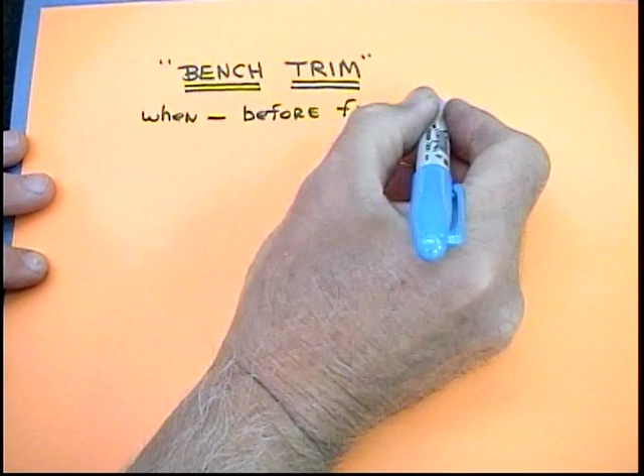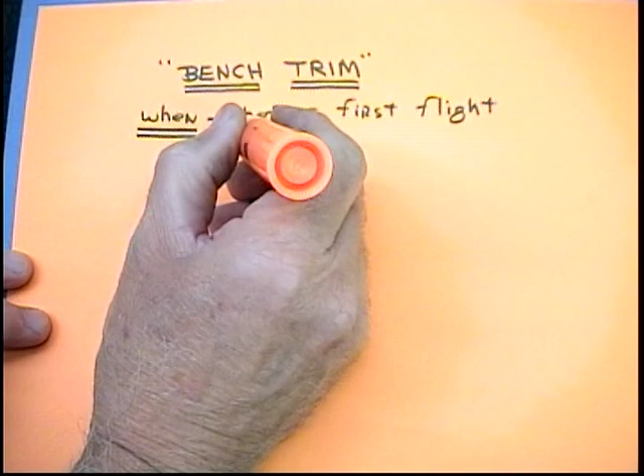Now, a lot of the things that I try to get across in my videos are very simple, basic things, but a lot of times when you think them through, what you're not realizing is this is a very simple point that's easy to miss. A lot of people would take that new plane, new profile, new whatever they've just built, and go out, take it right off the bench, and go fly it. Well, here's what I'm suggesting as a better way. Before the first flight, I like to do something that I call bench trimming. That's what most people call trimming out a model before you actually fly it. And how we go about doing it, and how we do it to various classes of planes, that's going to be the subject of this tape.

Now, why would you do it? A lot of people might ask, well, gee whiz, I just finished up my Flite Streak profile or a very simple plane, an ARF or ARC. Why do I need to do it? Isn't it all done when you buy the model? Well, some of it is and some of it isn't. But I want to cover the why.

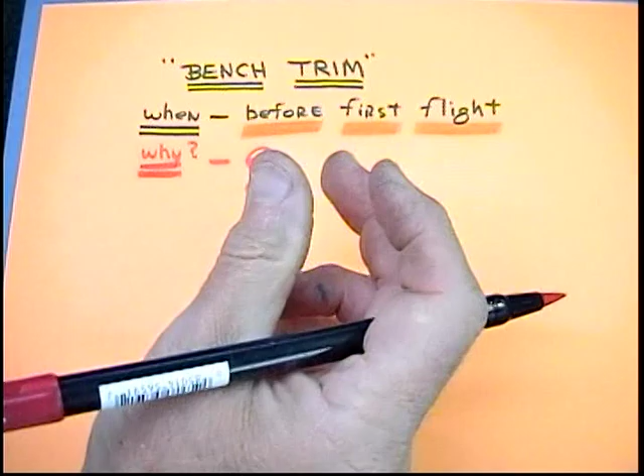Why? Because the various models, because of the way they're constructed and the material they use, whether they're ARFs, ARCs, or world-class world champion planes, they all deal with a thing called the center of gravity. And that center of gravity varies even in planes built by the same person at the same time with the same wood. That CG can vary. So part of this is going to be to identify where the CG is and then trim accordingly.

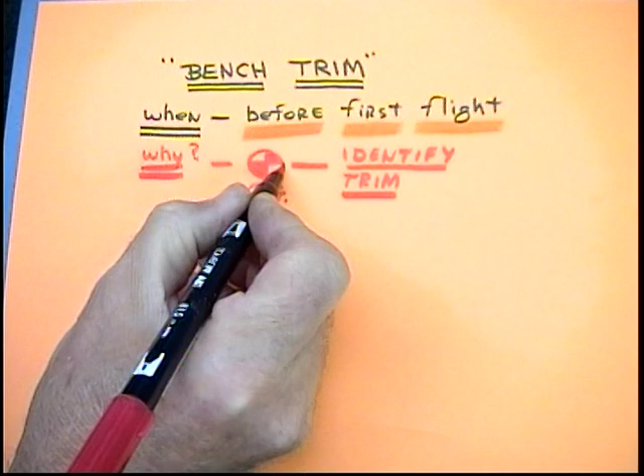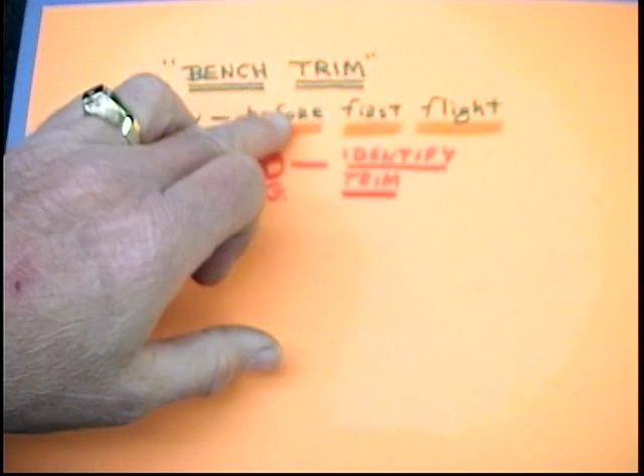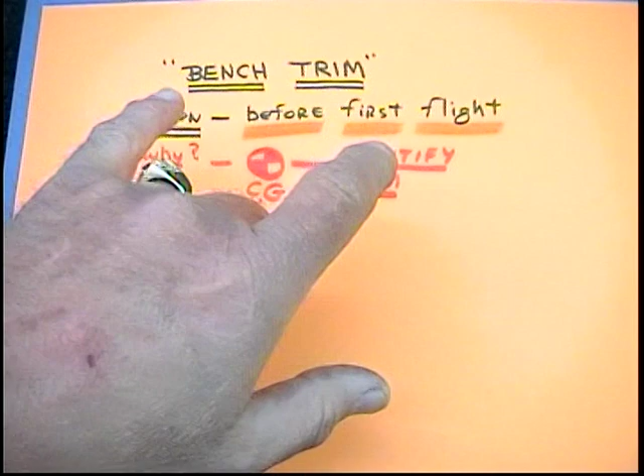We want to trim nose heavy planes, tail heavy planes, ships that have an incorrect or hard to deal with CG. But a lot of what we're going to be talking about is going to be called the center of gravity. So the first thing to really evaluate for yourself is when you want to do this, you'd really like to do it to maximize the potential gain before you ever fly the model. And that's why we call it bench trimming. And why would you want to do it? Because these CG locations can vary from model to model, among other things, including wing warps, things we're going to deal with in detail. But these are the basics. This is like 101 basic bench trimming.

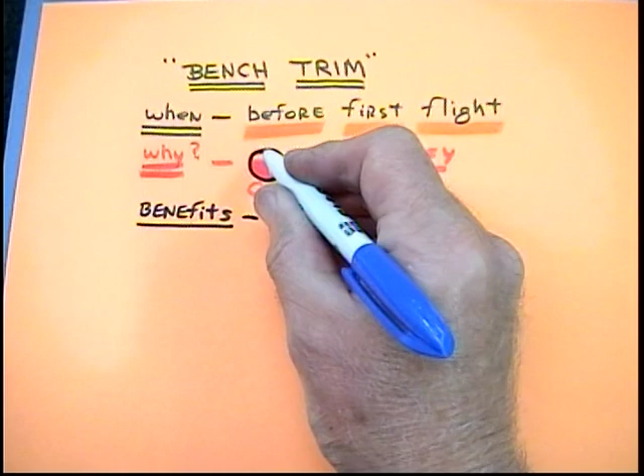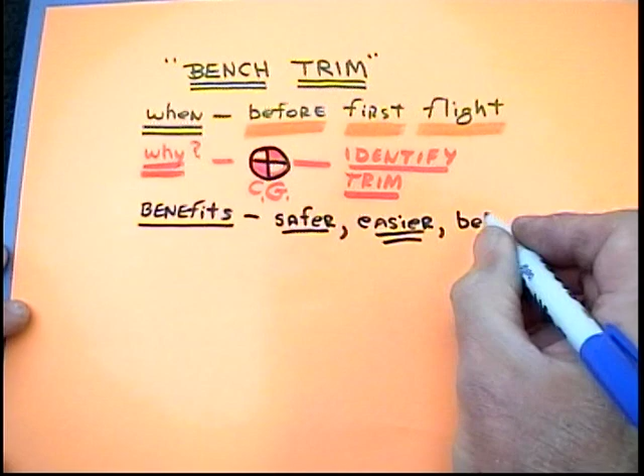So what would be some of the benefits of doing this? You're going to spend a couple hours, maybe more, maybe less, but some amount of time. Well, what we're trying to achieve, referring again to the center of gravity, the place where the model balances, some of the benefits would be the plane would fly safer, less prone to crash. It'd be easier. A model that's properly balanced, properly trimmed, and checked for warps is going to be safer to fly, easier to fly, if nothing else, and better, among other things.

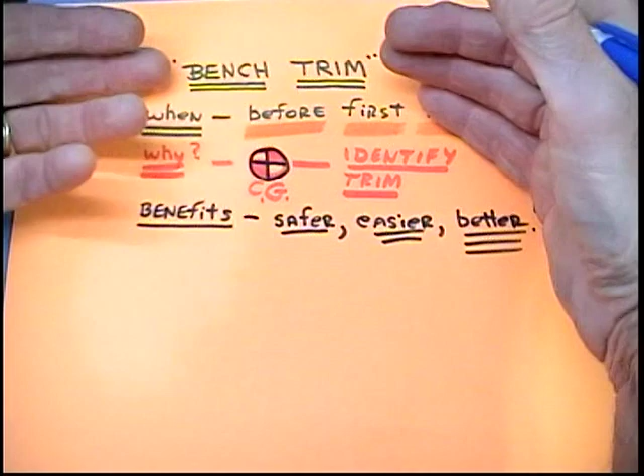So the point here is that, hopefully you'll get some of this information from this DVD, maybe some that you'll add to the information that we're exchanging, but you'll go through a process, and at the end of it, you'll be better off than you were at the beginning of it.

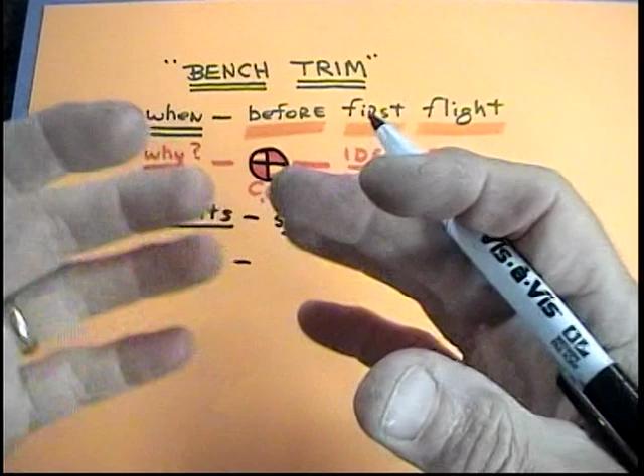Now, how to go about doing it—this is a method I've developed over about 52 years of flying these types of control line airplanes. I've tried to put all the information I've learned into all my videos and DVDs, but how to go about bench trimming it, how to get the most value in bench trimming.

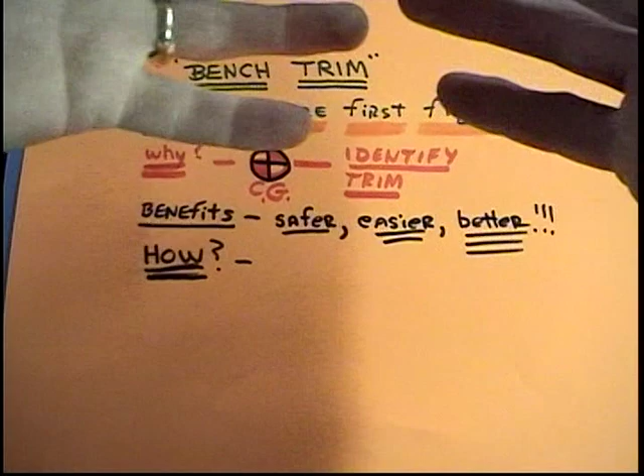So that you absolutely stack the deck in your favor for that first flight. We're going to deal with many various aspects and steps of how to bench trim. A lot of this, I've made up a little script that starts off with very simple basic things, and ends up with things that may or may not even be appropriate for people not trimming out world-class stunt ships. But we're going to try to cover the whole range of possibilities.

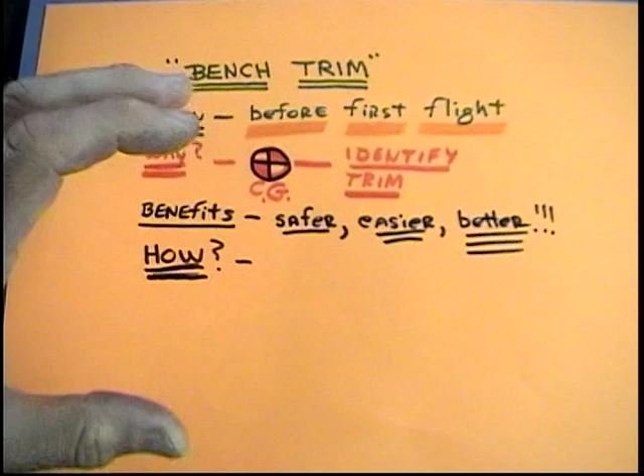We're going to try to do it in a way that makes sense, because the example I always use is a person that's really, really good at what they do, at teaching, can make a very complex subject seem simple and easy. That's what we try to do with all our videos, all our tapes. We'll also try to make it fun, but we want to start with a couple of basic things that'll help you understand what goes into bench trimming a model.

So the first thing I'd like to explain—we're going to use this Brodak Cardinal profile as an example. The first most basic thing anybody would want to know: you're going to have a wide variety of engines that are going to go in a model.

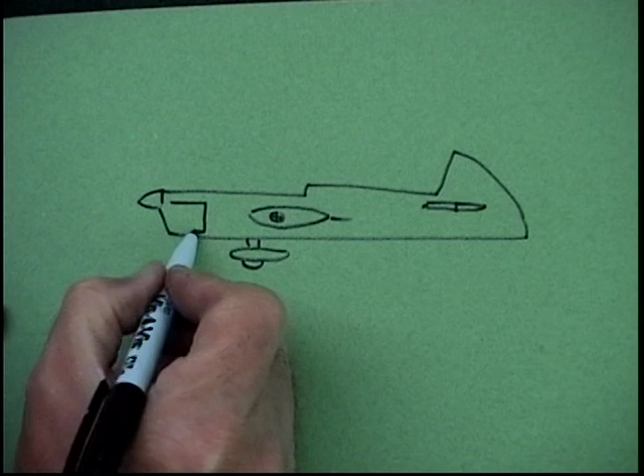Let's use an example. A Nobler was designed around a Fox 35. A big Cardinal was designed around a Super Tigre 60. Well, based on how much this motor weighs, we're going to turn the plane into something very similar to a seesaw.

Now let's just pretend the model is a seesaw—this is an oversimplification. On one end of the seesaw we have all the things that go in front of the center of gravity. This, of course, is the center of gravity. And on this side, all the things that go ahead of the CG, behind the CG.

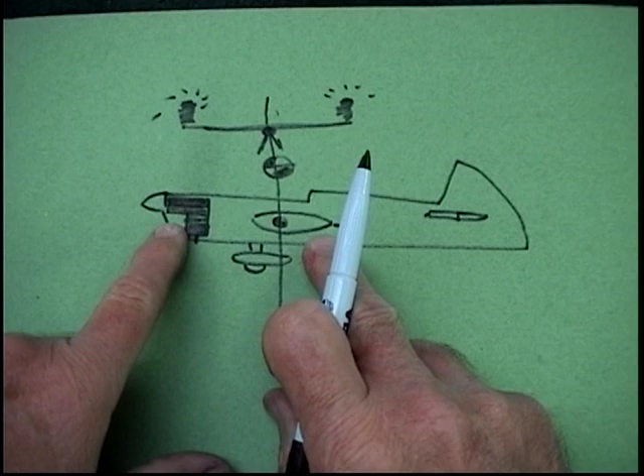What you notice right away is a lot of the heavier components—the motor, the fuel tank, the wheels, the landing gear, sometimes or most times the spinner, the prop—a lot of these things are ahead of the CG. However, they're closer to the CG.

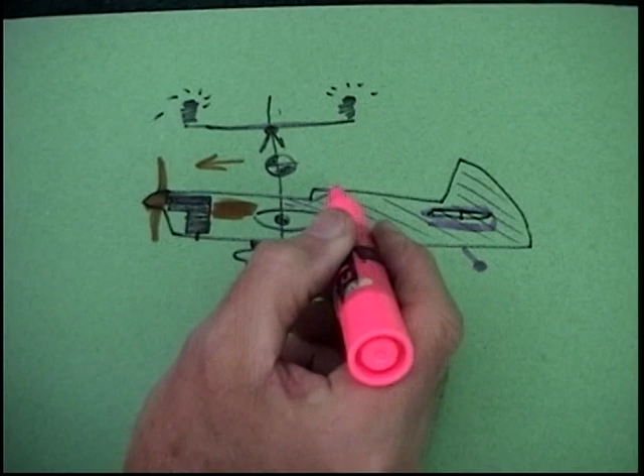A lot of the things that are behind the CG are a little bit lighter. The tail is typically lighter, the tail wheel is typically lighter. This amount of the body is typically lighter than the part with the motor mounts, but the problem is it's on a longer moment arm. And what the moment arm means is this part of the seesaw is longer.

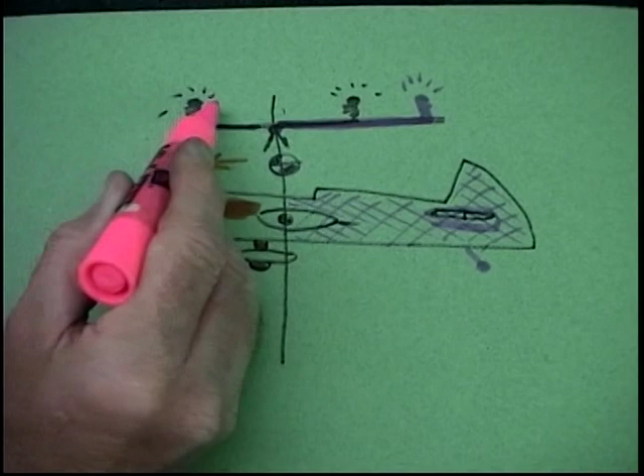So here's what we're really dealing with: a seesaw where the back is a lot longer than the front. The front is heavier, the back is longer. And understanding that gives you a real basic idea of what you're dealing with.

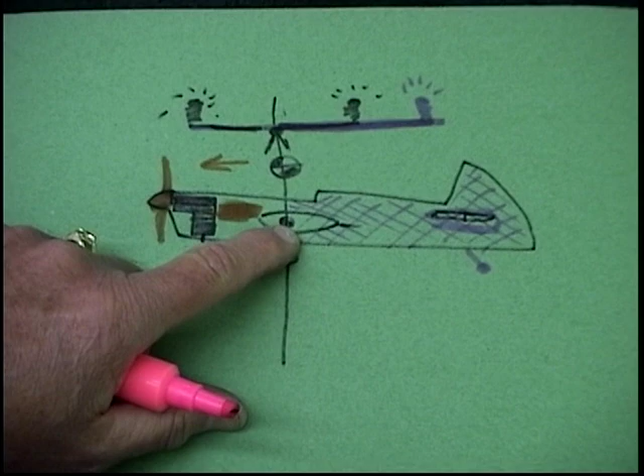But you need to know where that center of gravity is before you can really make any progress or even start to trim a model. The single most important thing to know when you finish a model and it's painted or MonoKoted, buffed, or if you just buy an ARF, is where does it balance? This is 101 basic—where does it balance?

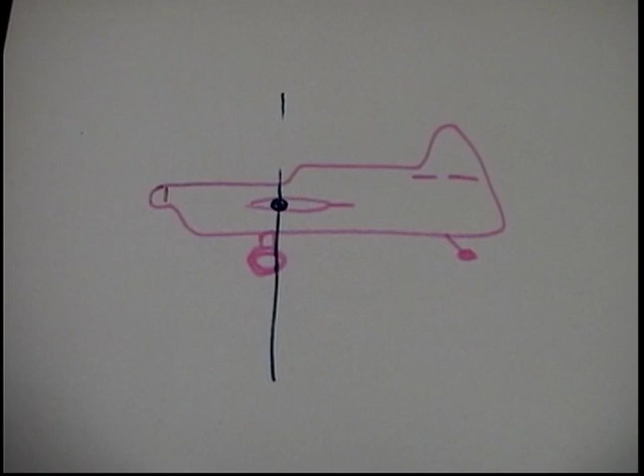Now, for all practical purposes, to be very simplistic about it, the simplest way to determine if a model balances is just put it on two rolls of paper towels—I would sketch these in—and it should, somewhere near the high point of the wing, it should balance.

In other words, when we lay a roll of paper towels out and lay the model out, if the nose tends to drop, it's nose heavy. If the tail tends to drop, it's tail heavy. So we want to know, first, before we do anything, with this new model: is it nose heavy or is it tail heavy?

And this is a basic way of doing it, right at the root of the wing, right outside of where the fuselage is.

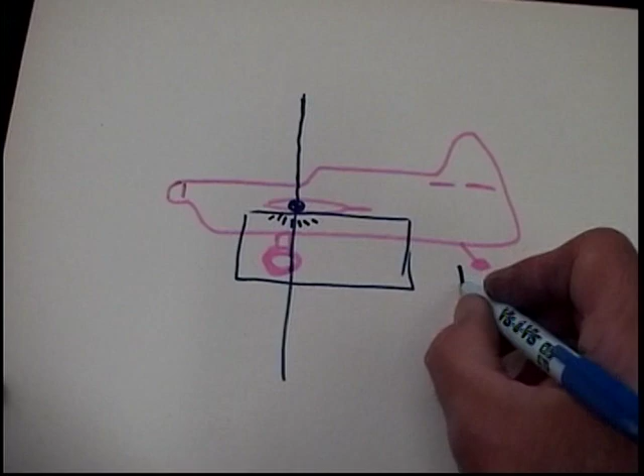If the tail drops, that's the worst scenario possible. A tail-heavy plane is very difficult to fly. It's unstable. So if we have a choice of, if it's not balanced right where the designer calls for...

If you look at a Nobler and you see where George Aldrich picked the center of gravity that he felt was optimum, well, if you're wrong and it's nose heavy, if when you lay it on the high point of the wing, the nose tends to fall down, it's a lot better than, in fact, let's just sketch this out. This we can live with.

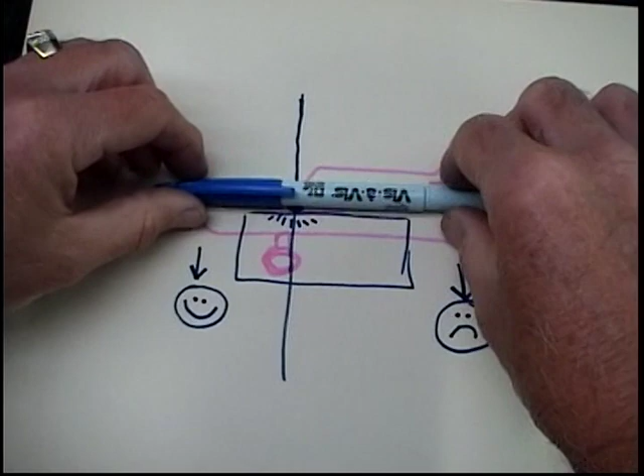This is going to get risky. So if it's not balanced in just about the way we'd like, or if we're wrong, nose heavy is going to be better than tail heavy. And it's going to be better by a lot, and for a lot of reasons.

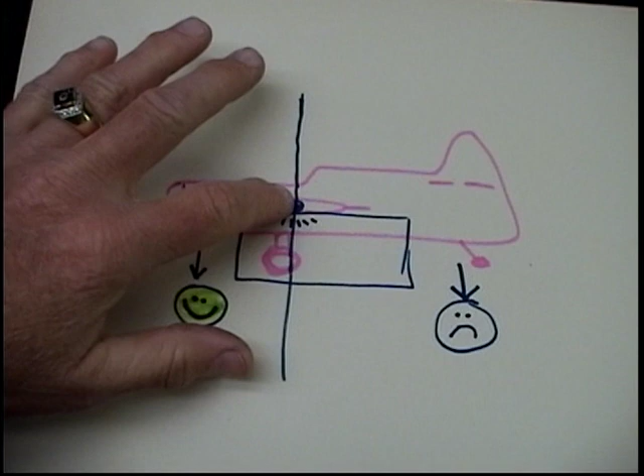And as we'll see, as we go through more of the detailed parts of this, this is only one center of gravity, but it's the most important one for the beginners or the new people or the people coming back to the sport after many years away.

First thing, before we go anyplace else, we've never flown the model, we don't even have handle and lines, we want to put the motor in, want to put the prop on, the fuel tank in, the wheels on, every part. And then we want to see where does it balance.

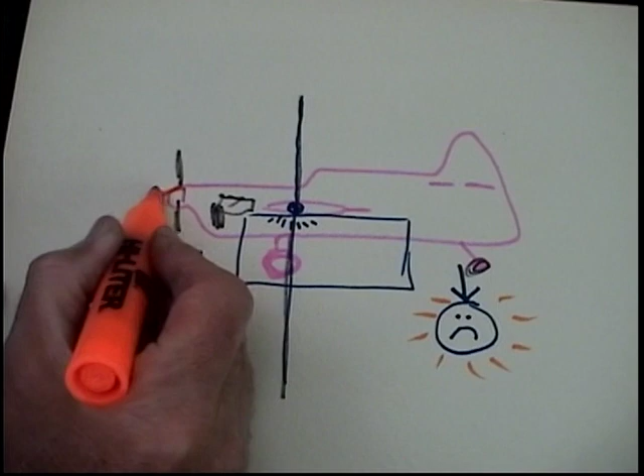Now if we find out it's a little tail heavy, or if that tail tends to sink down, the choices are very easy. We can put a heavier spinner, a nose weight, a heavier muffler on the motor, all of the above, a heavier prop. A carbon fiber or nylon prop instead of wood, or a heavier motor.

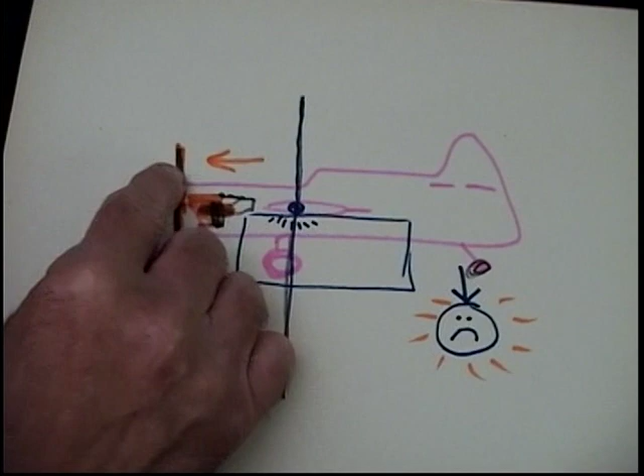But for sure, unless I was an expert flyer, I'd want to start with the model being nose heavy, and then little by little take some of this weight out. As you take the nose weight out, the model is going to get more and more unstable.

Unstable being that in level flight, it's going to want to change direction quickly, and of course, during maneuvers, it's going to loop tighter and turn tighter in corners. But every part of that trim is a trade-off. As the plane gets more and more unstable, it gets harder and harder to fly.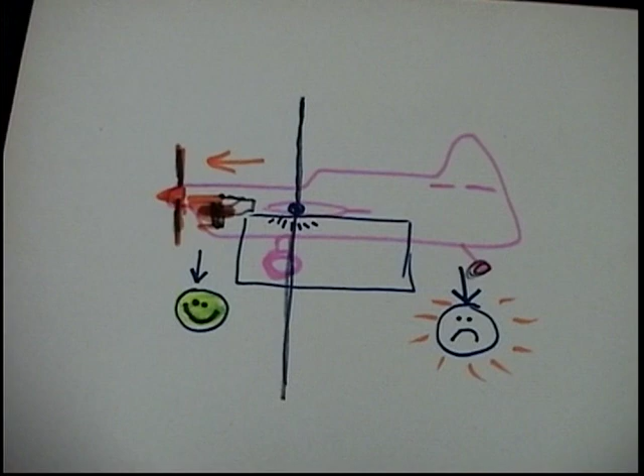So we want to reach a compromise where your skill level would determine this. Now, if you were, for instance, a rank beginner, or you're trying to teach your grandson to fly, you'd want this CG forward. Where it balances, even then add a little bit of nose weight.

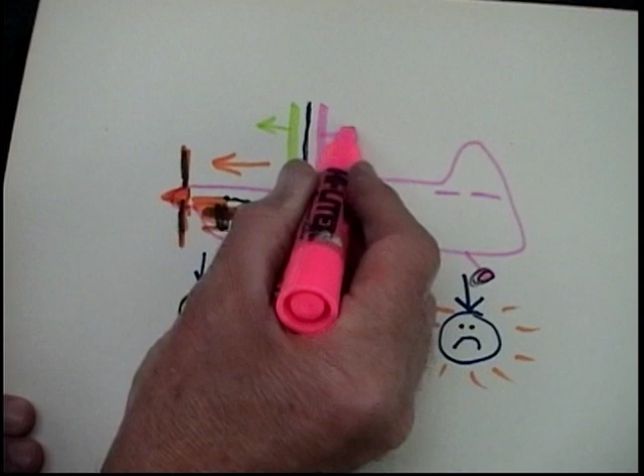As you get to be more and more proficient, more highly skilled, you can move this center of gravity back, up to a point. And there are reasonable and unreasonable amounts you can move this. But usually what you'll find is on most models there's a range.

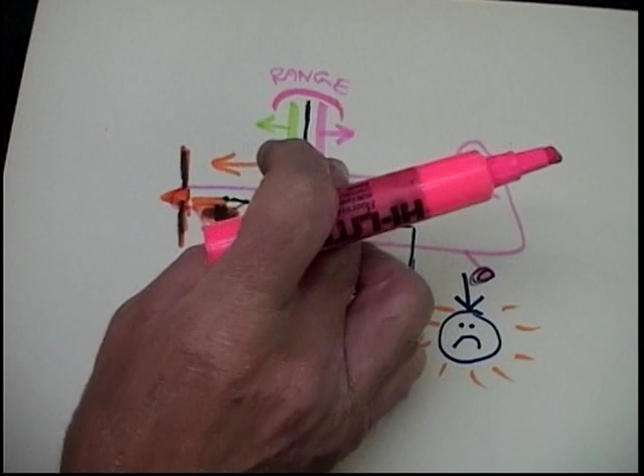I'll detail that out in terms of degrees later on, but there's always a range each model has where at this forward point a rank beginner would be comfortable. At this rear point, people that are very highly skilled would be comfortable.

Now what also tends to complicate this is as models get, a light model, if you build a kit and all the wood is very good and you tend to finish very light, do a lot of sanding, a light model tends to balance nose heavy, which is good.

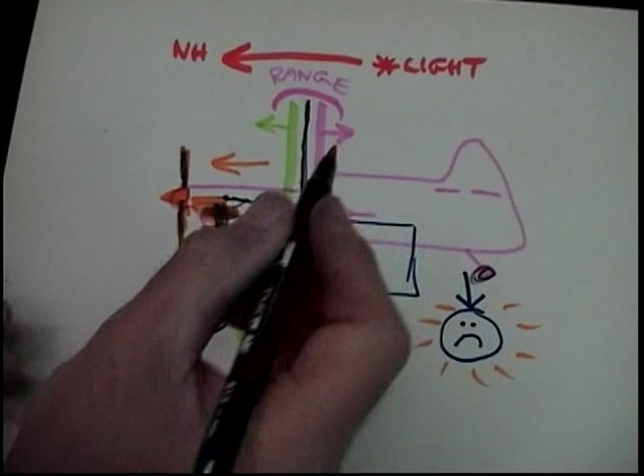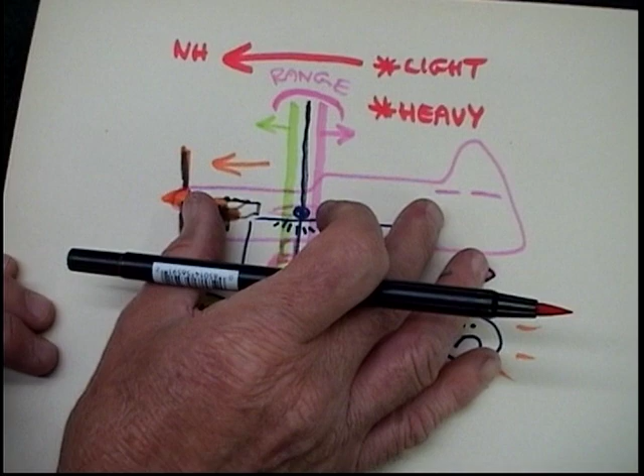If you build heavy and the total weight of the model, and of course this is all a subjective thing, let's use a Nobler for an example, and you build it at 50 ounces, the odds are real good it's going to be tail heavy.

The reason is more and more of the model is behind the center of gravity. So as you add material, paint, glue, that end of the model tends to get a lot heavier quickly than the nose part. So there's always the tendency.

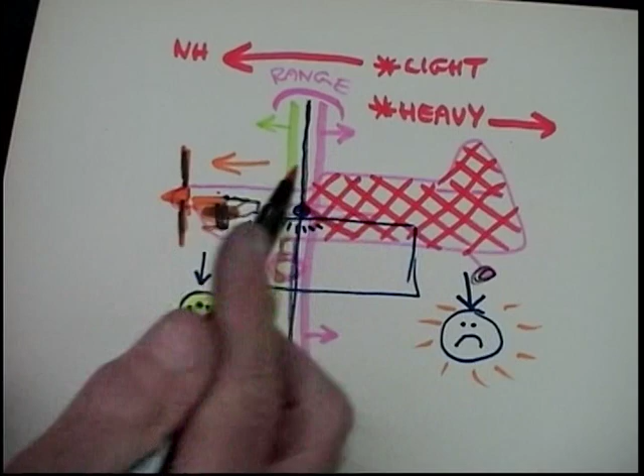A light model will tend to always be nose heavy. A heavy model will always tend to be tail heavy. And that's just a general assumption.

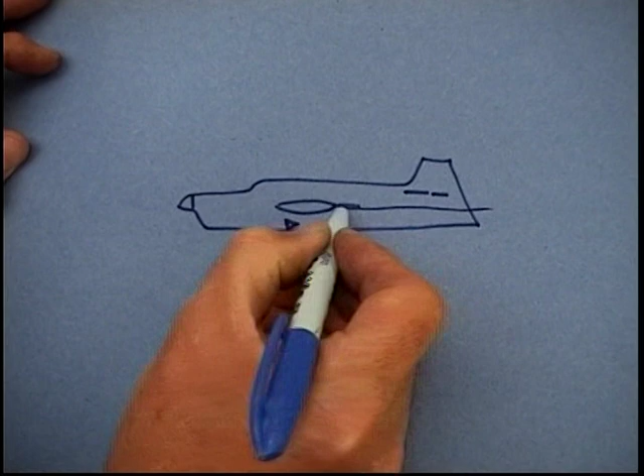Now we also have an issue of, and this is less critical, but still something you would want to know, is we want to divide the model up, the center of gravity. We call this the vertical CG.

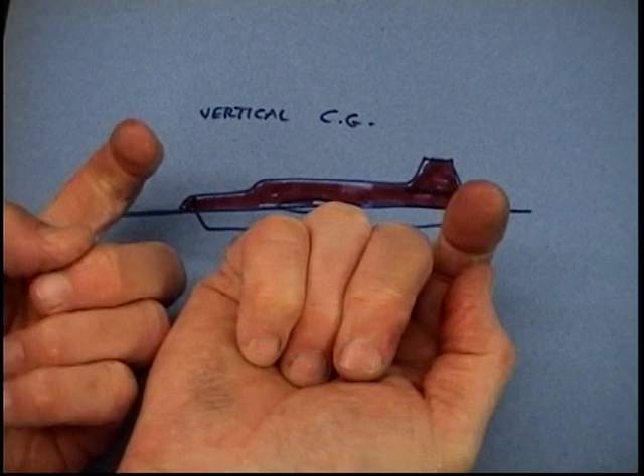Before you even fly a model, it'd be nice to know if the top is heavier than the bottom. The way to check that is normally with your two fingers: put one finger in front of the wing, right on the center line, and one finger behind the flap. This is the basic method for profiles and a very simple way to do it.

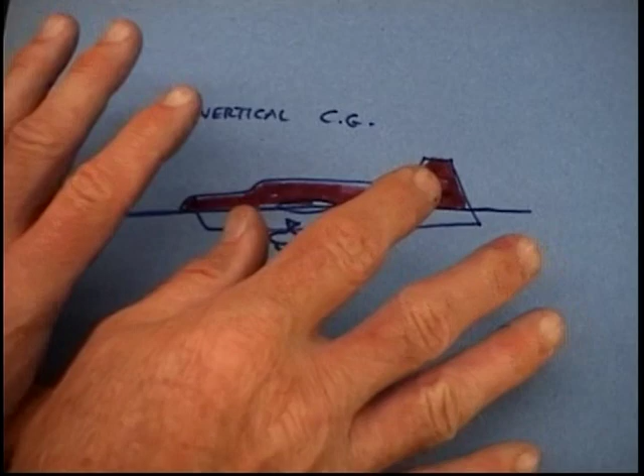There's a lot of complicated ways with plumb bobs, but this is a simple way: hold the outer tip down and see which way the model falls. That's when that model is sitting straight up and down, like it's sitting on its wheels.

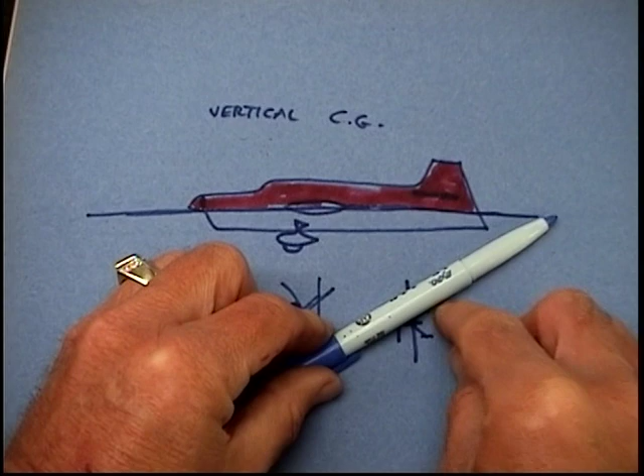Now, of course, it's the other way around, assuming you don't fly backwards and fly the traditional way. So while the model's like this, if it tends to fall with the wheels going up, you can add heavier wheels or make the landing gear longer. If it falls the other way, with the wheel side tending to fall down, that's a low CG, and it means the model will probably need a trim tab or some trim to keep the wing level. Let me explain why that is.

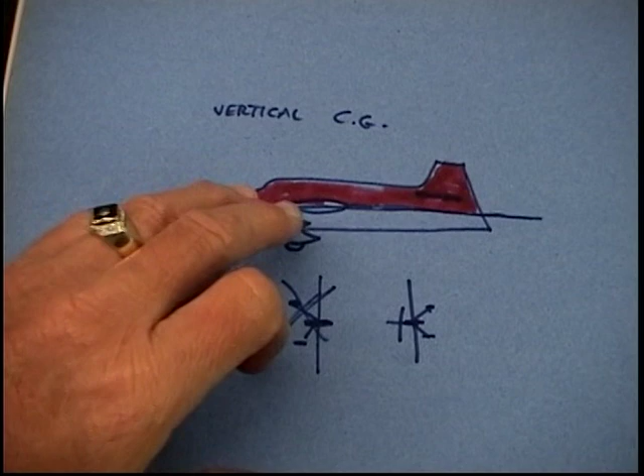This is getting into an area that's a little complicated, but certainly not out of reach for any accomplished modeler to figure out. Again, we're looking at the model head on, and let's emphasize what bad things happen when this is wrong. They're not as bad as when it's out of balance the other way, but still bad.

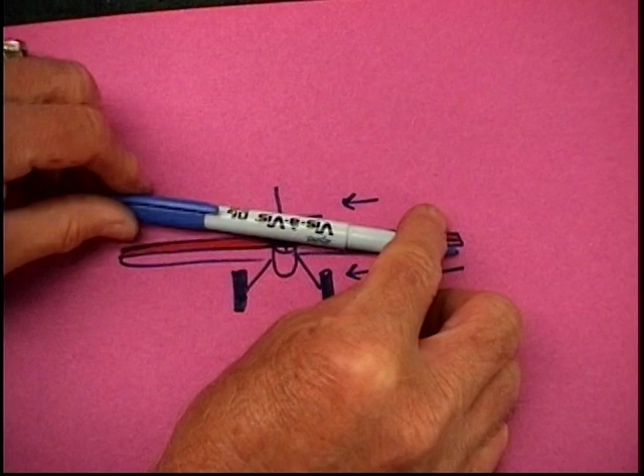So what tends to happen here: if the wheels are too heavy—let's pretend you have these old-fashioned Veco wheels that weigh about 1.5 ounces each, and you want them on for a nostalgic look—as centrifugal force acts on the model, it's not pushing on the top and bottom equally. These heavy wheels tend to make the model do this: the force down at the wheels tilts it up. If it's the other way around and the red side of the model is heavier, it'll tend to fly like that.

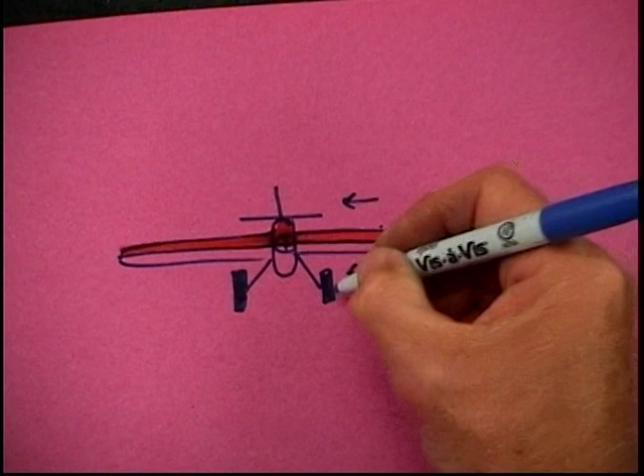Now, the truth is, you can make up for this in a lot of ways. You can correct the imbalance by making heavier, lighter, longer, or shorter wheel pants, or reorient the hardware on the model until it balances perfectly. But if it's wrong, and let's pretend it's important that you have those wheels on your old-time stunt model, it's going to want to fly up just a little bit.

We'll assume the wing is straight. A little trim tab will counteract that, putting a down force that will in turn push it back down. So what we're trying to do is balance off a lot of the different forces that act on a model—and this is one we can do right in the shop.

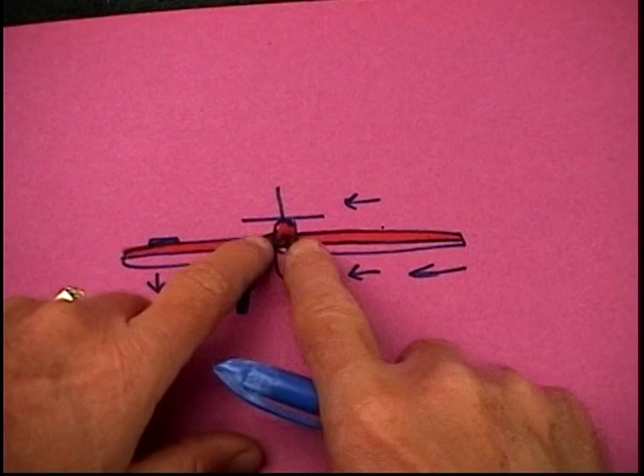Leveling the wing and making sure it's level, we almost have to fly the model to check, unless it's so out of whack you can see it from across the room. But the CG balance related things we can do on the bench, and that's the point of this video.

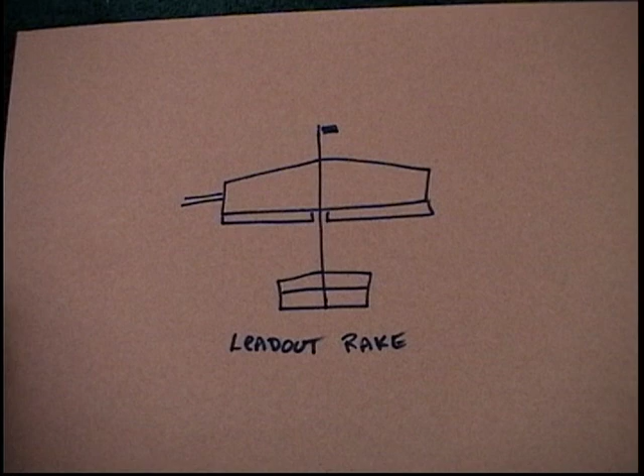Now the next thing to understand is the lead-out rake. If we know the CG is here—and we're just going to make a number up—let's say it's 6 inches from here to the center of gravity. We want to know the average point of the lead-outs, not where either one of them comes out. We want the average.

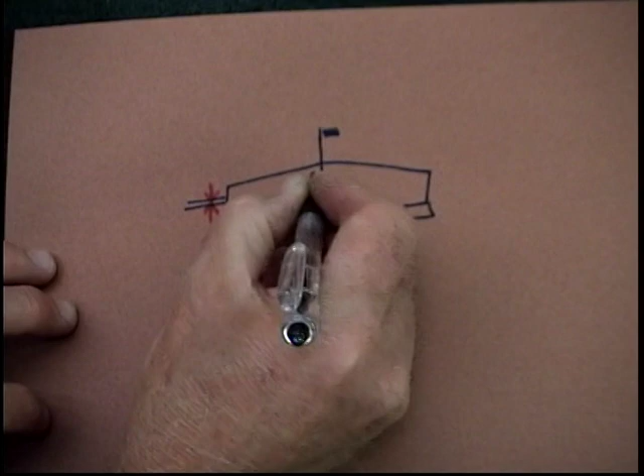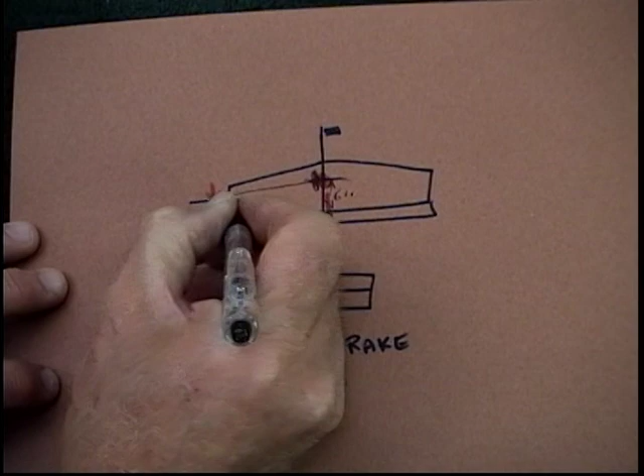So what would happen if our bell crank is in here? Let's put a straightforward bell crank in there, and we know this is 6 inches to the pivot point of the bell crank. Where do the lead-outs come out on a typical model? Well, on almost all models, they'll be raked from 1 inch to 1.5 inches. That rake means these lead-outs don't run parallel to the hinge line—they rake back. A good starting point is 1 inch to 1.5 inches of rake.

Right on the bench, the model doesn't have to be flown. This is bench trimming. We have a whole video on how to do air trimming once the plane is flying, but this is to get it safe.

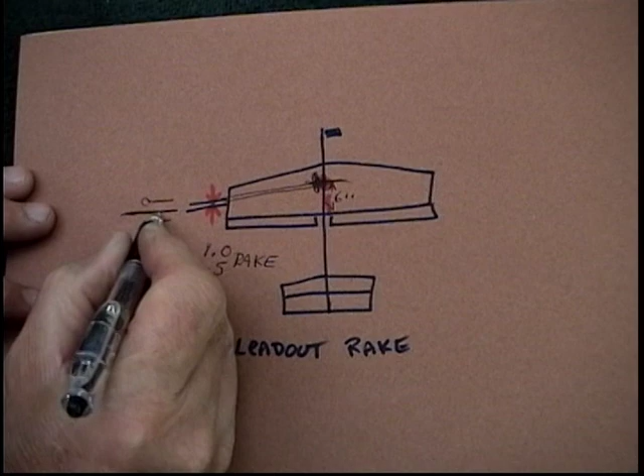Now, that dimension is the average point—it isn't the front lead-out, and it isn't the back lead-out. It's the midpoint, the average point that counts. We measure the average back, and let's say in this case it's 6 inches to the bell crank bolt, and this would be 5. That gives us 1 inch of rake. 1 inch of rake is a good place to start trimming most models.

Now another thing, while we're checking dimensions, this assumes that either the designer put the lead outs at the correct place, a la Nobler, or you have adjustable lead outs.

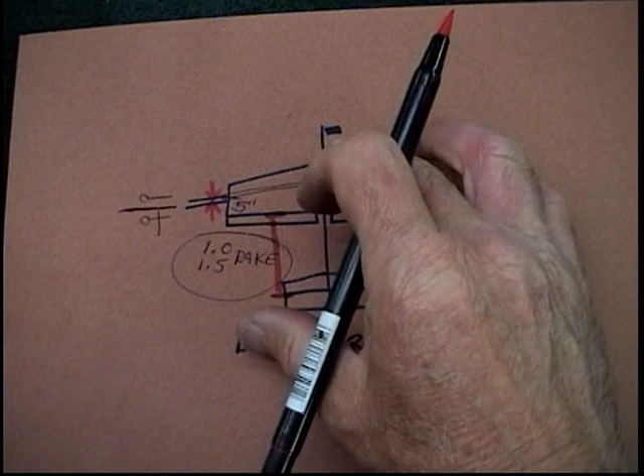Also, while we're checking, we'd look at hinge line to hinge line. We pick up 4 points here. We'd like to know that from hinge line to hinge line, these are equal. If they're not, it means the model is going to have trim issues later on. You might want to address that right now or when you're building the model. This is a very important thing, to have hinge line to hinge line equal.

Equal hinge lines, 1 inch to 1.5 inches of rake, and some very slight rudder offset, very slight motor offset, maybe a degree or 2. All of these things combine to make the model stable and hold line tension the way it's supposed to, the way it's designed to. Now, we can go to a worst of all worlds scenario, which is what I always do.

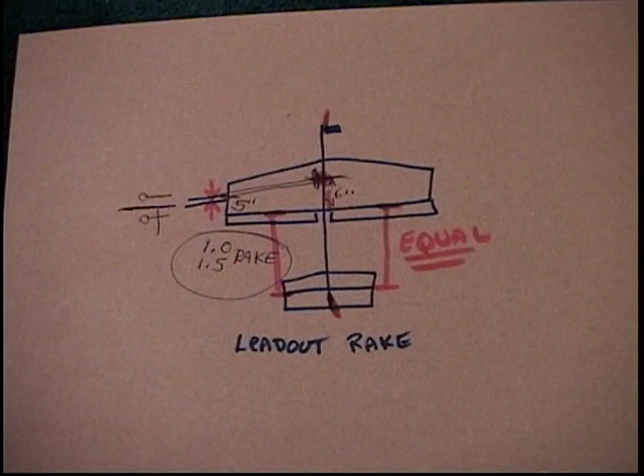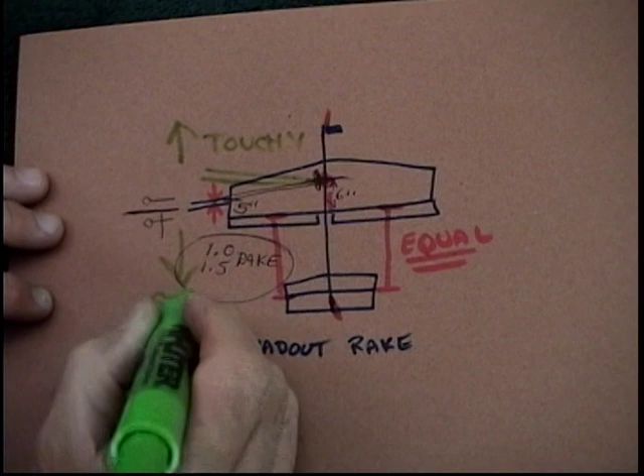I always try to explain to people what's the worst that can happen. If the lines are raked in the opposite direction, negative rake would mean you are really going to have a handful of a plane to fly, because as you move the lead outs forward, the plane gets touchy. As you move the lead outs back, it becomes stable. This is why we have to pick that mean average point, because we want to have hopefully the best of all worlds. We don't want to have a plane that's real touchy, almost impossible to fly.

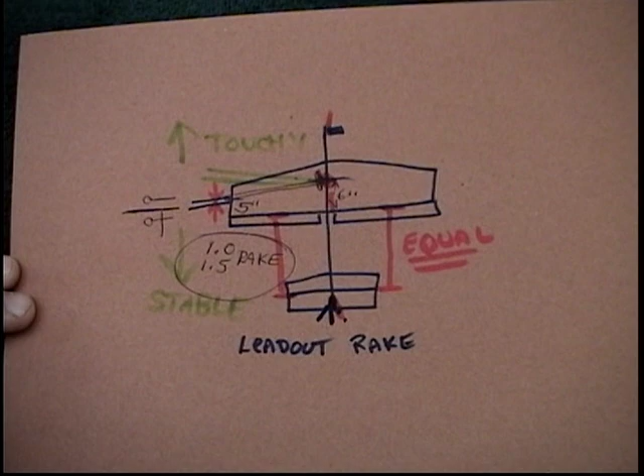The other thing, if you're going to have a rudder, it's straight or a little bit offset, but never in at you. You don't want the rudder in at you, for sure. If you have motor offset, if it's 0, well, that probably would be okay. A little offset on a profile especially is okay, but you never want to have it pointing in at you. This is the no-no part of it.

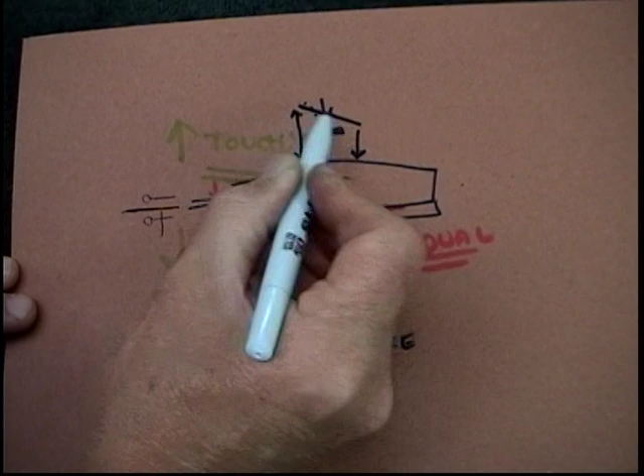Now, the way you would measure this, real easy. Put a prop on the plane and measure from this prop blade parallel to the fuselage. A good place to start is when the outer part is 1/8 of an inch less, from a 1/16 to 1/8 of an inch less. The longer of the two dimensions, you can measure right to the middle of the prop blade.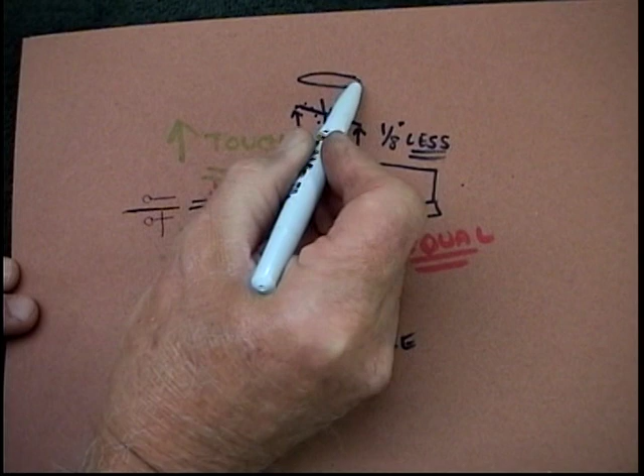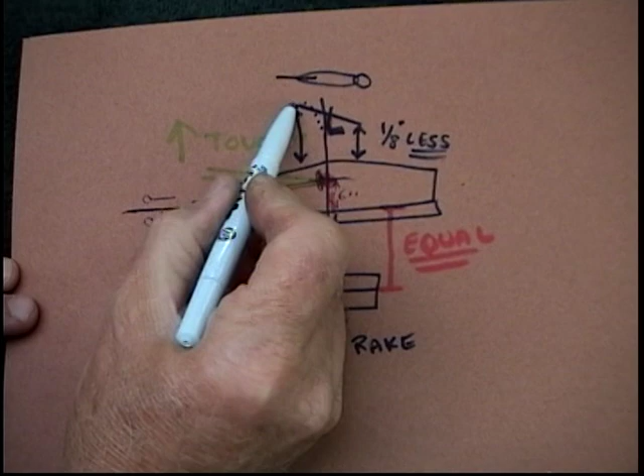If you really want to be scientific, you can take an old prop with one blade, and I'm going to just illustrate this. This is the high-tech way to do it, and CA it on a pin or a piece of wire. Then flip it, so that ensures that you don't have crooked blades. That wire now would allow you to measure this a little more accurately.

The choice of having 0, not sure. I always like to have a little bit of offset, 1/16 to 1/8 of an inch. If I'm just starting out and the person I'm trying to help is not highly skilled, 1/8 of an inch is better than a 1/16, and a 1/16 is better than 0. If we're dealing with new people, a little extra rake doesn't hurt, 1.5 inches, but negative rake could be a real problem. So these are things that you want to check before this model ever gets fuel in it.

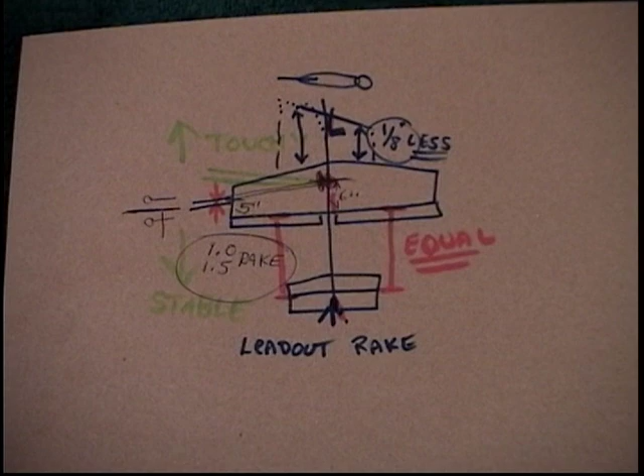Now the next item assumes right in the beginning that you have an adjustable tip weight box. Most modern plane designs do. If you don't, clay, children's clay, is a good thing to have in your toolbox. Heat it in your hands, roll it up in a ball, and slap it right on the front of the wing. In other words, if the airfoil is here, let it go around the front of the airfoil.

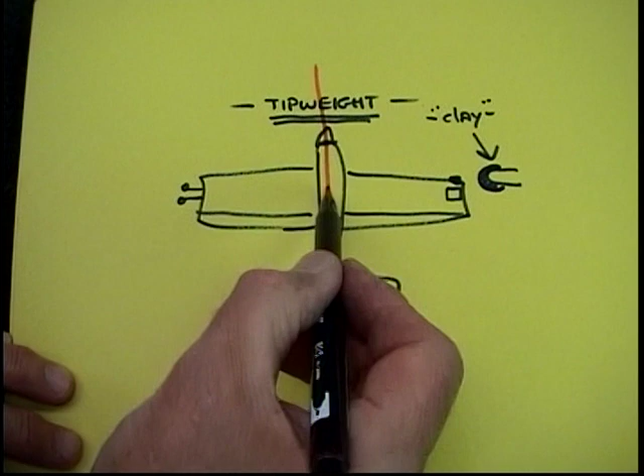Now, how much do you put on there? Well, let's pretend you don't have any way of knowing where this model balances. We know that part of what we're trying to do is work all the things into balance. In a perfect world, here's what you would have: you'd be able to balance the model either upside down or right side up by holding the prop and maybe putting something under the tail wheel and putting a scale under this wingtip, a gram scale.

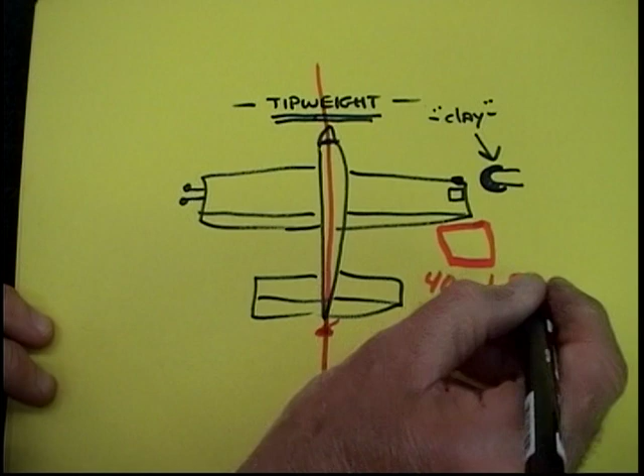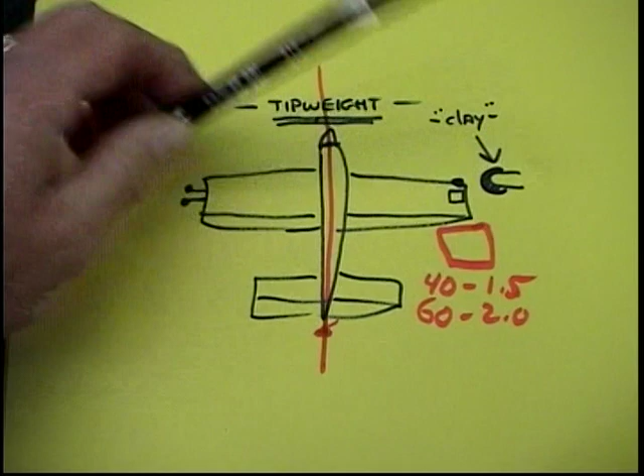On a typical model, I would say this: on a 40 size model, 1.5 ounces. On a 60 size ship, 2 ounces to start with. You'd probably take some of that out, but that's a good starting point. That would mean that as you put the model up on a scale and balance it so it's free to seesaw, you'd like to have the scale read 1.5 to 2 ounces.

The reason you do that is because you can't account for how heavy this wingtip is. Is this one hollowed more than this one? Using a scale accounts for all that, so it's a little better to do it that way. Does that mean it's the only way? No, of course not, but it's the better of the two ways.

The other way is you get chunks of lead or clay, take that amount, and put it in the tip weight box or put it in clay on the outside of the wing.

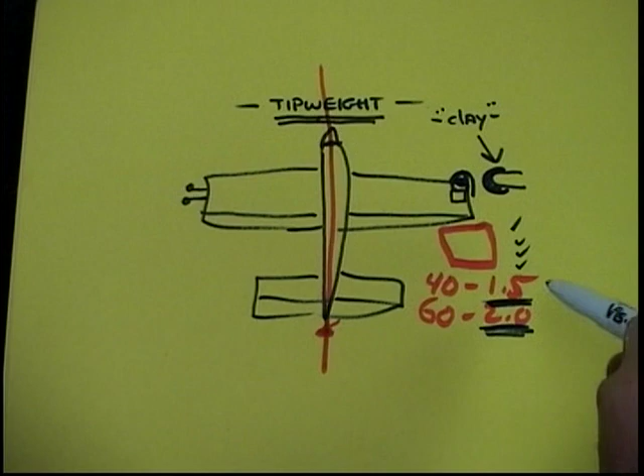Here's the scenario: if you're wrong and have a little too much, nothing bad's going to happen. The plane will probably drag a wingtip and have a lot of line tension. Then you take it out little by little until you're happy with the line tension and how the model's flying. But for the first flight, a bench trim, I'd always want a little more than a little less. A little more is never going to hurt you, other than the plane having a little more than normal tension. A little bit not enough is risking the model.

Now, these are some of the other desirable things you can already have if you have choices: a motor that's already broken in.

A motor that's been in a plane, you pretty much know how it runs. It's a proven commodity, it's an old friend. It's always better on a new plane that you're bench trimming to not have to deal with a brand new, unbroken-in motor. So having a motor that's an old friend can really help.

Let's make an example: if last year you were flying a Twister and this year you build a new Twister, what would really make sense is to take the motor out of last year's plane that has all the flights on it and put it in the new ship. Because you know that motor, you know how it runs, what prop goes on it, and all the little idiosyncrasies that go into it.

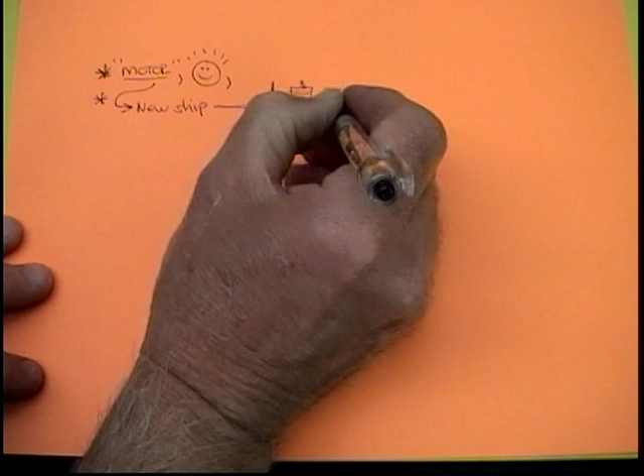Having a motor, a fuel tank, and a prop - let's be real clear about this, because a lot of people cheat themselves in a way. There's the fuel tank, there's the motor, good artwork, prop, motor, tank. If these are from the previous model you've had, or if you have a 60 stunt ship and took last year's prop, motor, and tank - which I've done in the past, I've taken it right out of Miss Ashley and put it right in another plane.

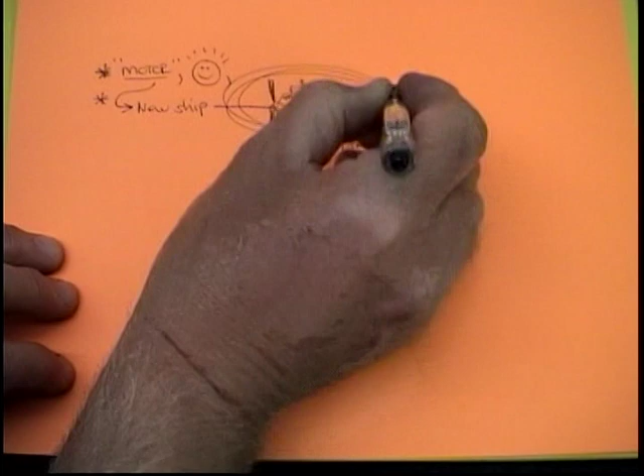Now these are proven commodities. You don't have to worry where the tank shim is going to go, what glow plug is going to work the best. The more homework you can do ahead of time, the easier you make it on yourself. So having proven things is always to your advantage.

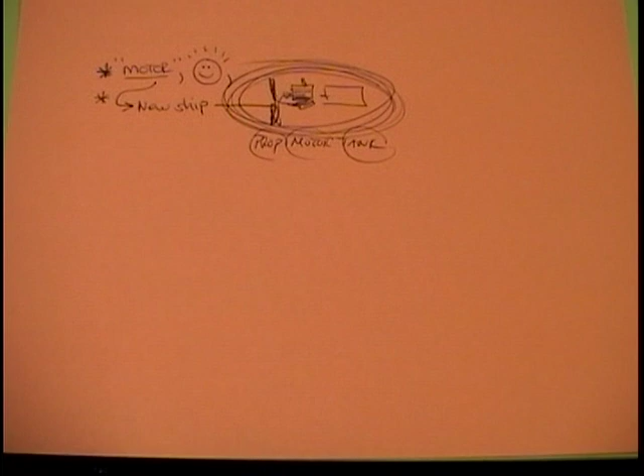Now, up to this point, these are all things we need to check in the shop. Prop clearance is one. You'd be surprised how many people have a model that sits at a bit of an angle, and they put a prop on, and it has clearance when the tail of the model is down, but as soon as it gets up for takeoff, you don't have enough clearance.

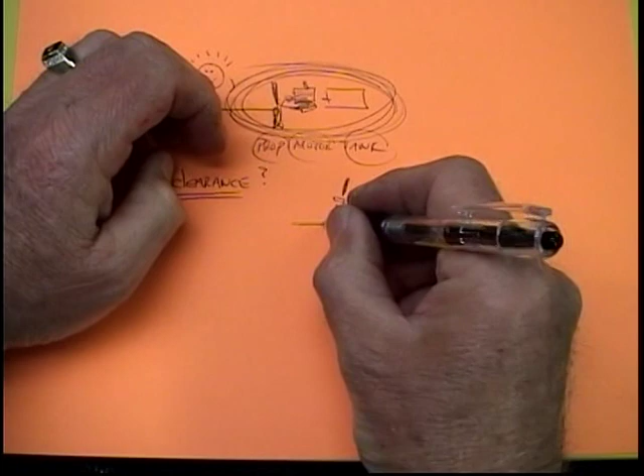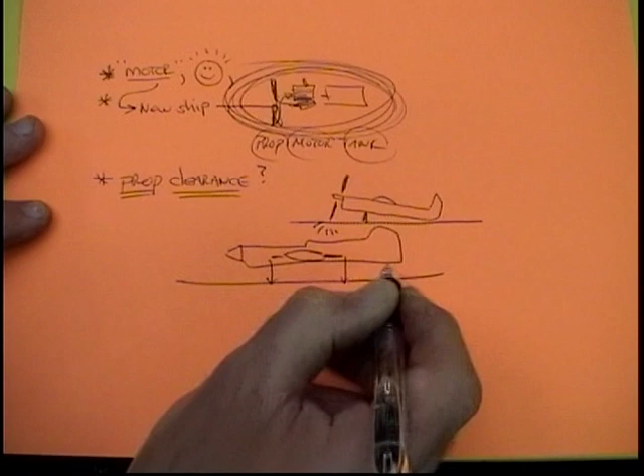This is really where a lot of people have accidents for sure. What you should do is measure these two dimensions, center line to center line, so that they're equal. In other words, put something to raise the tail of the model up so it's sitting perfectly level to the table. Put the prop on that you intend to use, and I would say a minimum would be half an inch of prop clearance.